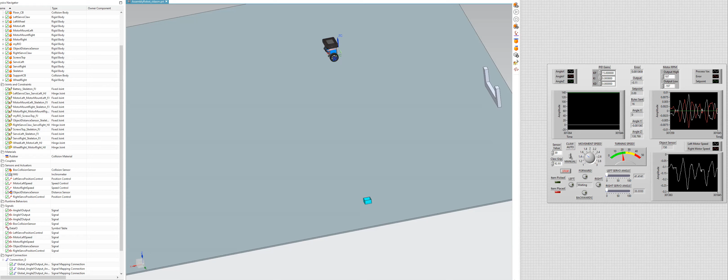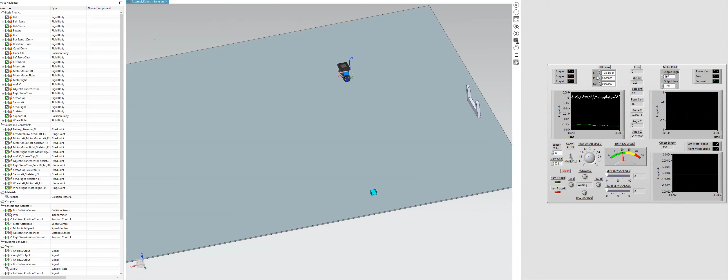So my robot has been properly simulated in the NX software with the right physics, collision bodies, rigid bodies, sensor data, and transmission between LabVIEW and the NX interface. And if I press start on the simulation, you can see that the robot at the moment is balancing based on the PID gains that have been tested multiple times. And after many rigorous attempts, I found that Kp equal to 15 and Ki equal to 0.008 are the best values.

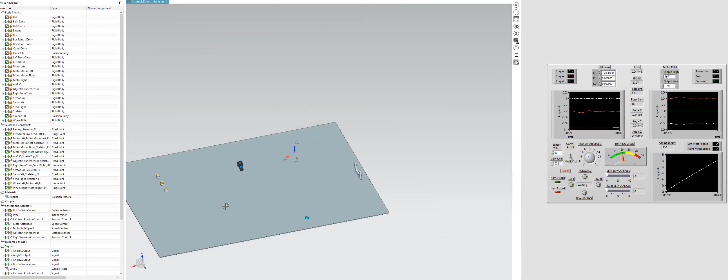Now, as I said earlier, the robot has to stay perfectly balanced and also withstand an external disturbance. As you can see, I'm moving the robot and the robot is still perfectly fine. And there should also be a manual control from the user. In my case, the user not only can control the robot if it goes backwards, forwards, left or right, but can also control the turning speed and movement speed.

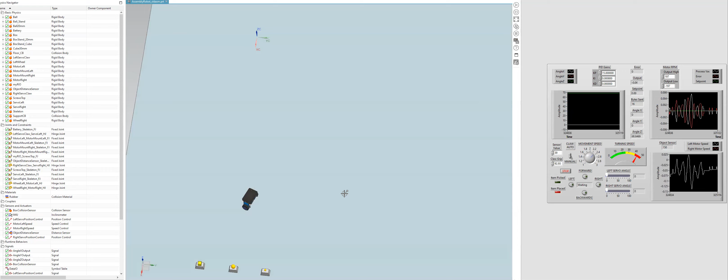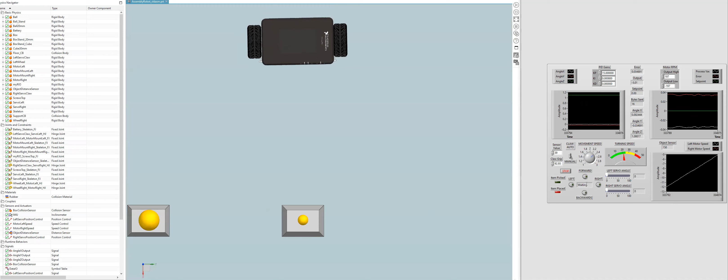So let's try to go and pick up the ball and discuss the claw and how it works. The ball has been placed on a podium; it is a 20mm diameter ball with a rubber material applied to it and a collision body. And if I reduce the turning speed, I can have it a bit better. Now, if the robot is parallel to the podium, it helps, but it does not have to be. The podium can be made as a cylinder, and then this limitation would be completely removed.

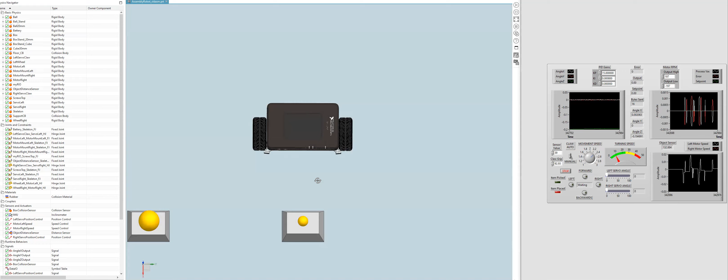Now that I'm close and parallel to the wall, I want to show you that the claw mechanism, which completely retracts inside the robot's body, can be moved manually by the user using these sliders from 0 to 100 degrees, both of them. So a user can pick any type of object by just simply changing the angle of the claw.

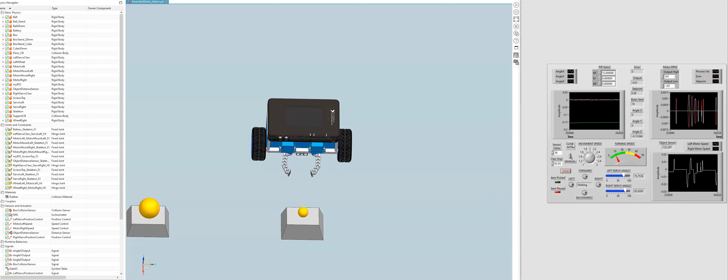Now, there is also an automatic claw system that I have developed. If the user flips the switch on, the claws return to 0 and they retract inside the body. And now, based on the sensor value and the claw grip that has to be inputted by the user beforehand, the ball will be picked up automatically. What this means is that when I pick up the ball manually, I can see what kind of sensor value I have by looking at this, from the sensor itself, this is an infrared sensor, the Sharp infrared distance sensor, to the ball, and then also what's the angle of the claw in order to pick it up.

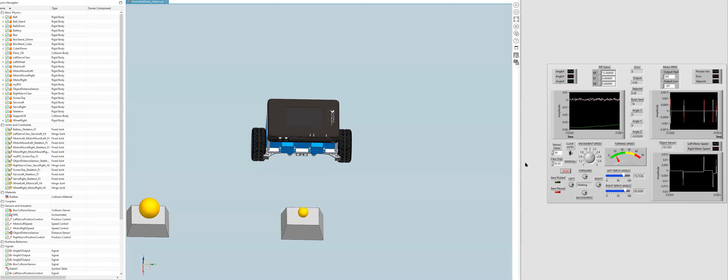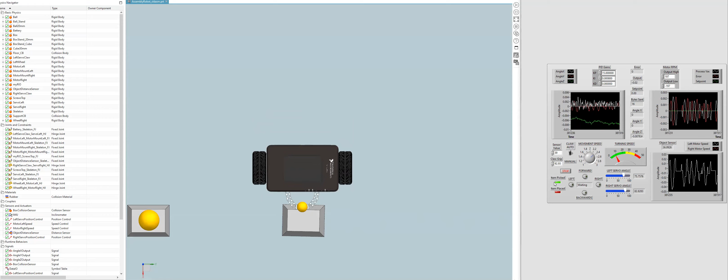This is very useful in a factory environment. Once we have picked up manually once, we can know exactly what values are required, and then just input those values, and the robot would do it automatically. So let's change the view from up top. The automatic claw is engaged, and now if I just go forward, once it reaches the ball, it picks it up and then it goes backwards, and the green LED starts blinking.

Now, let's try to move the robot towards the container, which is there. Let's increase the turning speed. Let's move to the left. Let's reduce the speed by a bit. Let's go forward.

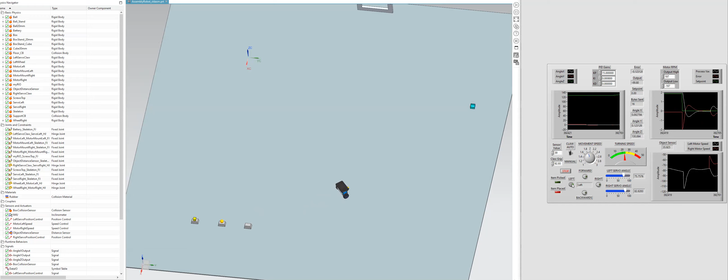As you can see, the robot stays perfectly balanced even with the claws fully open and with a ball, a ball that doesn't have that much weight, but it is still extra weight nonetheless. Let's make it so it's from the top again. And let's zoom in.

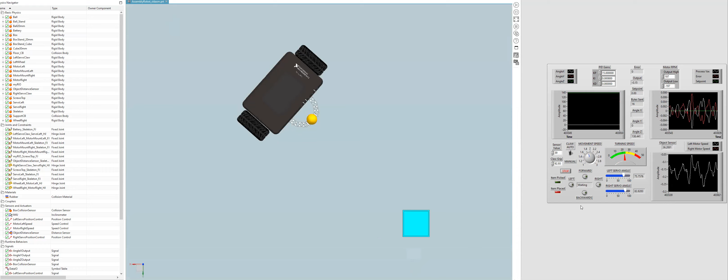Let's try to go towards the box. And once I am on top of the box, as you can see here, let's go a bit to the left. Now I'm on top of the box. I can just release the claw. So let's go forward a bit.

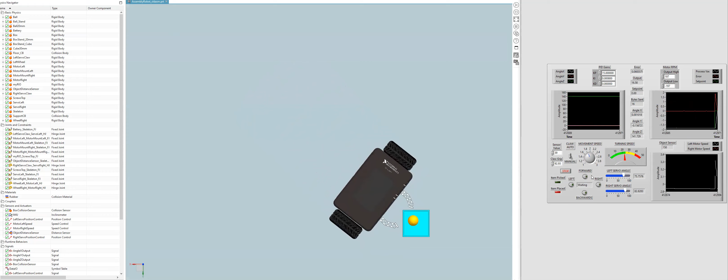Can release the claw. The red LED starts blinking. The green LED stops blinking. Let's increase the speed and go backwards a bit. And the ball has been placed inside the box itself.

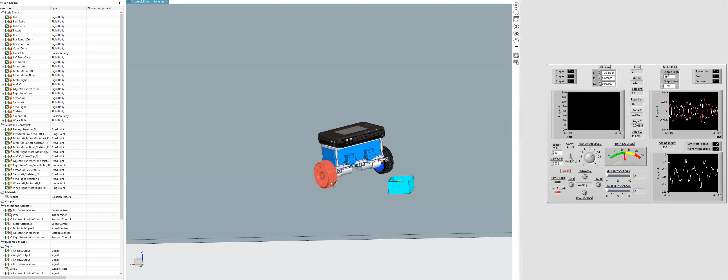Now, the main features of this robot is the fact that it is very compact. It has a very small design. We're talking about around 15 centimeters by 20 centimeters. The myRIO device can be completely removed. It works based on a sliding mechanism, so that makes the robot even smaller if it is required to be moved anywhere. And the claws completely retract inside the body.

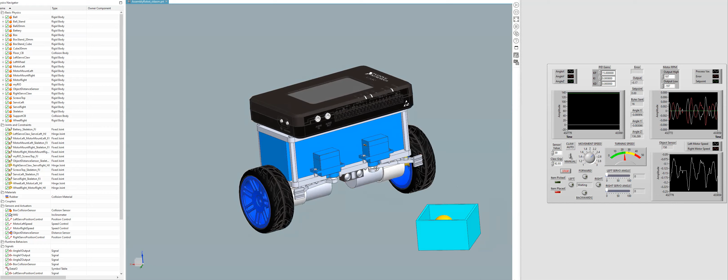Not only this, but because the claw is based on two different servos that are SG90s, these servos are 1 centimeter away from the body, they're able to pick up 2.5 kilograms. Now, of course, the robot itself will not be able to pick up that much since the weight of the robot is nowhere near 2.5 kilograms, but that is a very good specification to have for the robot. So the weight of the item that is picked up is not a problem.

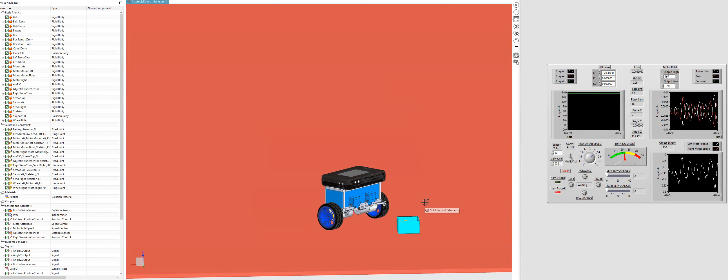Furthermore, because of the claw that can be manually moved and then manually programmed so that the action happens automatically, this robot will work very well in a factory-like environment.

Furthermore, the user interface has been highly detailed so that when there is research and testing done on the robot, so let's say in a real life scenario, if this simulation has to be applied to a real life robot, the user can see all the outputs and all the information in order to react accordingly and change the required variables.

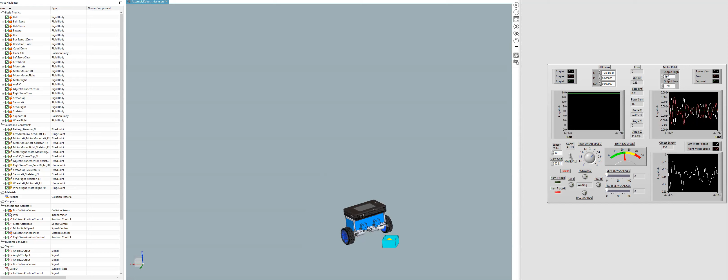I also added the motor RPM, which is connected to the PID highest output and lowest output, so that if in real life the motors that I use are not of 197 RPM, like the ones that I used in the simulation, the user can change this output without actually having to change the constant inside of the block diagram in LabVIEW.

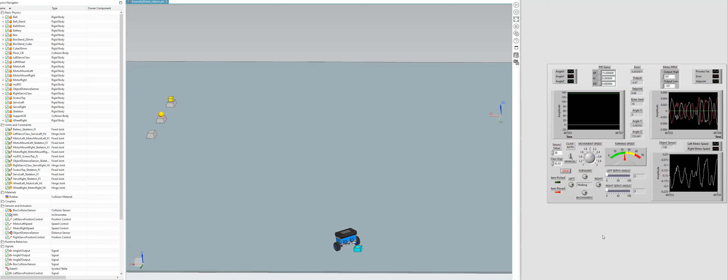A small issue that this robot has is that inside of a factory environment, it does not work autonomously. So it still requires manual movement from the user, although the claw happens automatically. Now, in the next section, I'll show you my experimental autonomous program and the idea behind it.

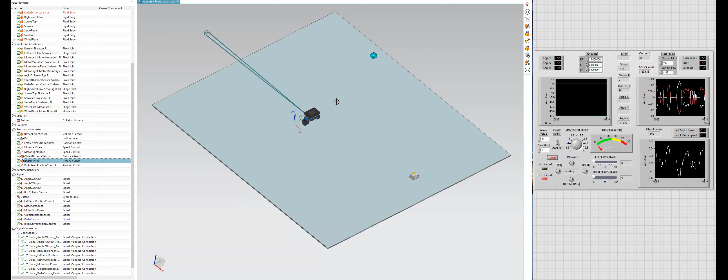Now, in the second section of this video, I went ahead and changed the simulation environment and the LabVIEW code to something that is very similar, but this time there is no manual input to the robot, so the robot cannot be controlled. What happens though in this environment is that the robot now has a Sharp infrared sensor, on the opposite side of the one that picks up the ball, and this sensor can see up to 1.5 meters.

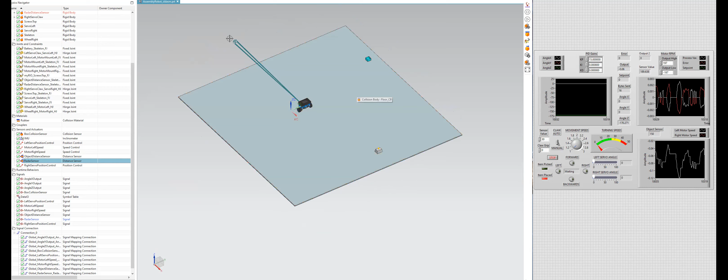The way this has been programmed and the idea behind it is that the robot can rotate in place and act as a radar, and when the infrared light beam hits an object, it detects that object and it goes towards it. So as a demonstration, if I click play, you can see that the robot will turn in place into its default state and it will stay balanced. And once it detects the podium, it will stop and then it will go towards the podium. As you can see, it's going towards it.

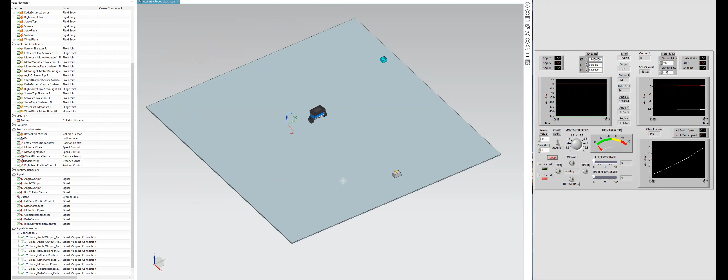Now, when it is very close to the podium, in my case 300 millimeters from it, it will just stop. So you can see the robot stopped. Now, this is very useful because if I change the podium to any place, it will always go towards it and will always detect it. So this feature would be very useful in an environment where we do not know where the podium is and how we can reach it. But if the robot can reach it, it will do it automatically without any kind of user input.

Now, this is where the highly experimental demonstration of autonomy stops. But the next points would be to make the robot rotate on itself so that the automatic claw can engage, pick up the ball, start rotating again with the radar function, find the box for the ball, the container, and then go towards it and then release the ball once it reaches close to it. So that has not yet been fully developed, but as an idea, that works perfectly.

Another way that can be done is we can have the robot use the radar function to find the podium, and then a line following track towards the box container in order to have the robot go towards the container itself.

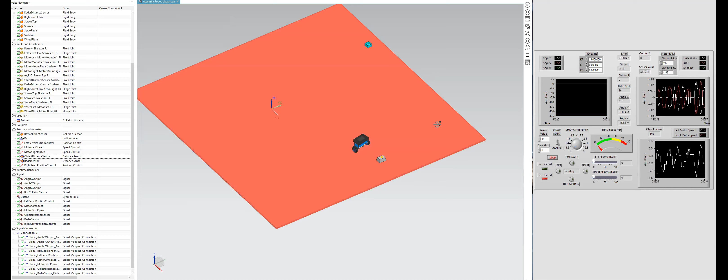With all this said, this has been my full demonstration of all the progress that has been made in NX and LabVIEW in order to have a self-balancing robot that follows the brief accordingly and also has extra features that have not been requested in terms of autonomy.